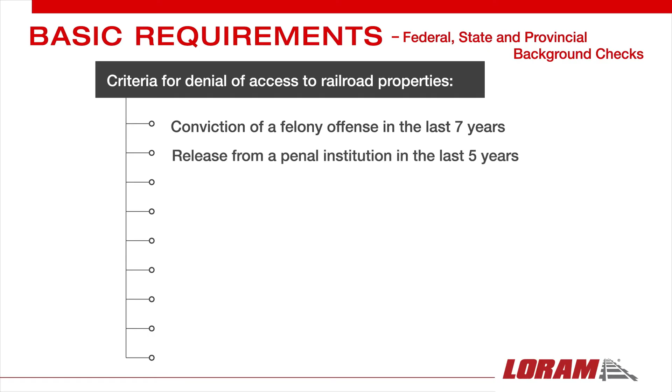As an applicant, you must pass Loram's federal, state, and provincial background checks. The background check includes history from the past 7 years. During the background check, our vendor will be looking for any of the events listed here, but not exclusively these events. Please review the list carefully. Having any of these events in your background could be grounds to deny you access to railroad properties, which in turn would make you ineligible to join our team.

As an applicant, you must also successfully pass the E-RailSafe background check. The purpose of the E-RailSafe program is to improve the security of railroad employees, operations, and facilities. E-RailSafe background checks are required by our customers to access their property.

Driving is essential to the job. You must meet Loram's driving requirements and have a current valid driver's license. We'll also review your driving history for the last several years.

Employees must also complete a urinalysis and alcohol screening during the first week of training. If you test positive for the presence of drugs, you will not be eligible for employment with us. Loram has a zero-tolerance policy regarding the use of drugs and alcohol.

Loram uses a third-party provider to administer the physical abilities test that assesses your ability to safely perform the essential physical functions of the role. You will perform a series of physical tests that could include gripping, pinching, pushing, pulling, lifting, carrying, or working in specific postures. If you have any questions regarding the basic requirements of the job you're applying for, please take notes and ask when we meet for an interview.

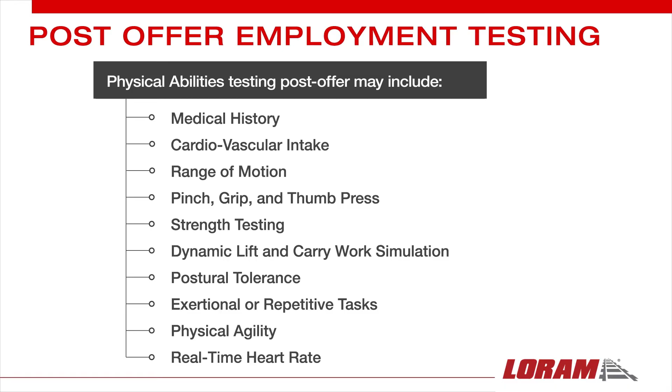During your first week of training, a pre-placement physical is required and is conducted by Loram's Occupational Medical Review Officer. The Medical Review Officer will make the final determination of whether you're fit for duty based on the findings. Review the list to see what is included in the physical.

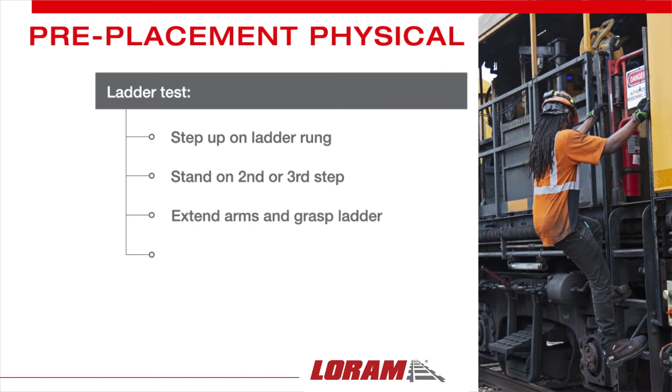Another requirement of training is the ladder test. Have you ever seen a ladder on the side of a rail car? Those are very similar to the ladders we have on our machines. You will be required to step up onto the ladder rung, which on the rail ladder is a second or third step up, and stand holding the ladder, extending your arms out, holding your own body weight for roughly 1 minute.

Here's a quick recap of the basic requirements.

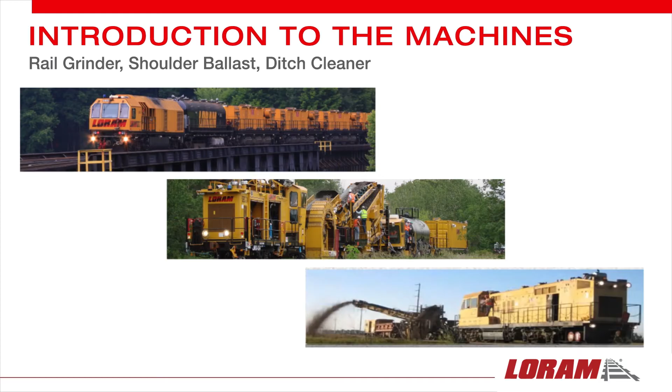Now that we've reviewed the basic requirements for employment, let's take a closer look at the 3 types of machines you might be assigned to as a rail equipment maintenance operator. Rail is the single most valuable asset for railroads. Replacing rail before it's necessary leads to significant costs and lost revenue. Rail grinding is the most effective maintenance practice to control deterioration.

Loram offers the most versatile technology in rail grinding equipment. Ranging in size from 4 stones to 120 or more stones, Loram rail grinders can fulfill any need in the industry. Our grinders incorporate high-powered, flexible grinding modules with a patented control system to maximize efficiency and create the most productive machines on the market.

In addition to extending rail life, a proper rail grinding program produces a wide range of benefits, both financial and operational. When you work with Loram, you're working with an industry innovator. We're currently collaborating with the National Research Council of Canada on cutting-edge research to validate the optimum amount of rail to remove to maximize rail life.

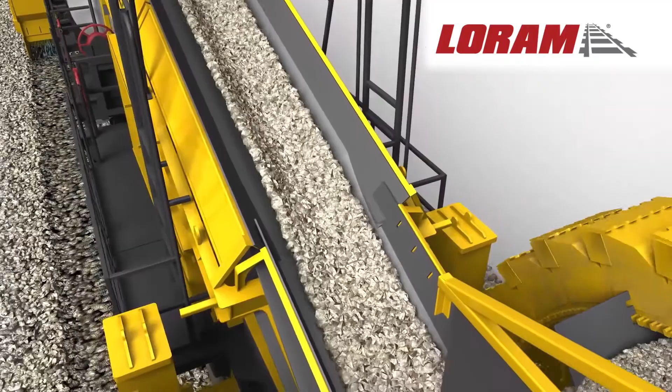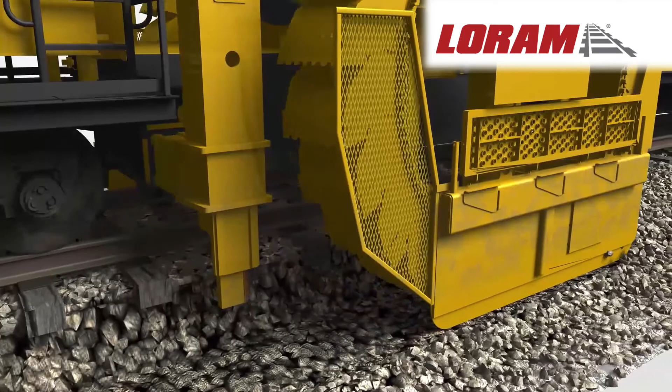Proper drainage is essential to maintaining a solid foundation for rail. Water trapped in the ballast section affects the interlocking mechanics between rocks. In turn, this causes the ballast section to lose strength and deteriorates track geometry.

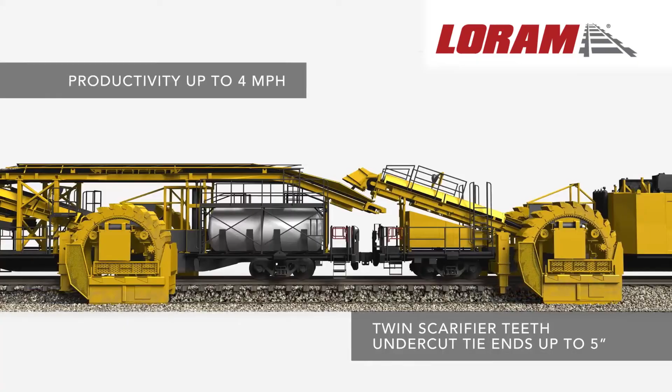Ballast cleaning breaks open mud pockets and releases trapped water to restore proper drainage. The Loram high-performance shoulder ballast cleaner removes ballast from the tie ends outwards. It then separates fines, and distributes cleaned ballast back to the shoulders and reshapes it, doing this all while continually moving down the track, setting the standard for speed, performance, and reliability.

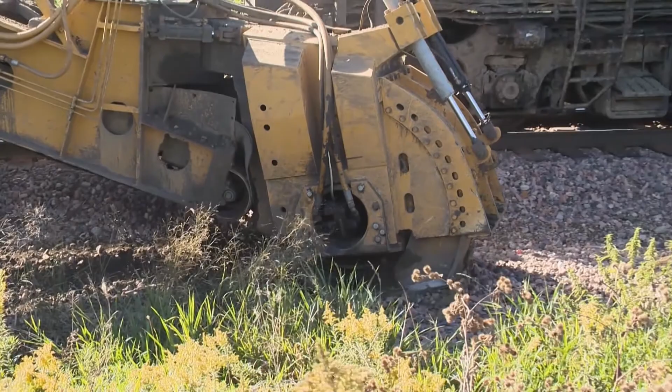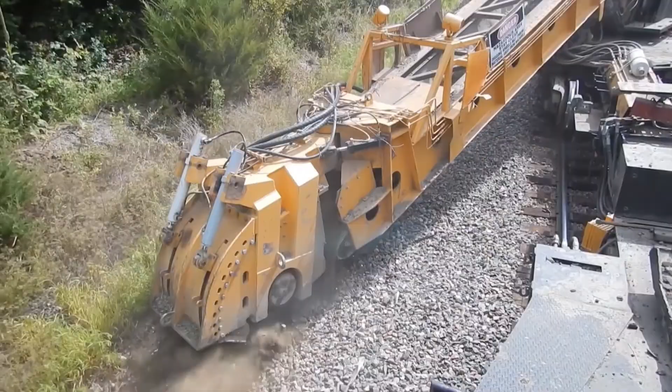You can't realize the full advantages of ballast cleaning without a proper ditch to intercept and divert water from outside the track and provide necessary drainage from the ballast. Loram's Badger Ditcher creates a drainage ditch that increases the stability of the ballast and subgrade by moving water away from the track. The machine's ditching wheel cuts a trench and shapes it to suit a railroad's specific drainage requirements. It can move up to 800 tons of material every hour, making light work of big ditching jobs.

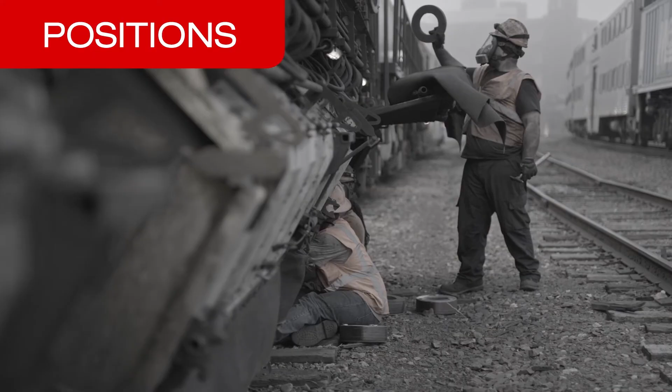Rail grinders have both an operating and a maintenance shift. Both shifts typically consist of 3 rail equipment maintenance operators. Crew responsibilities will be to take temperature readings, monitor gauges, and check fluid levels.

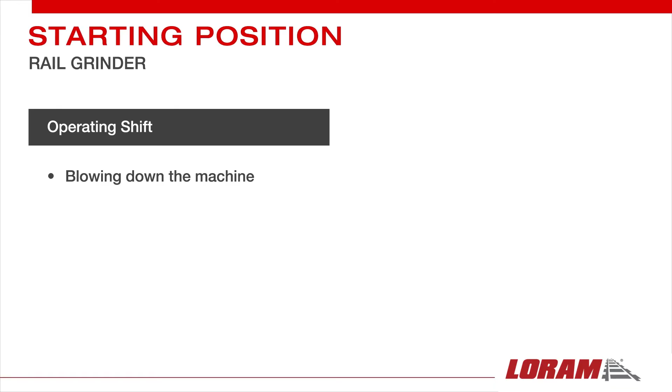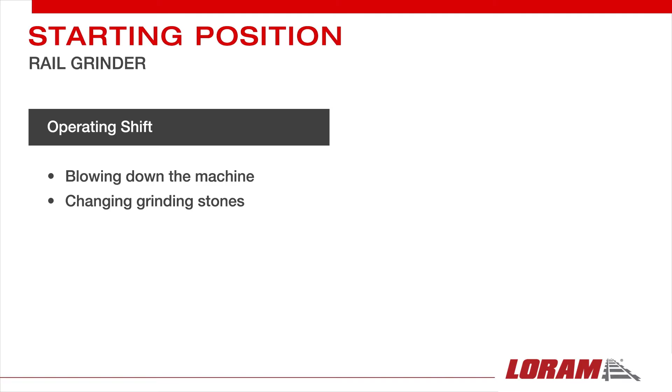You'll also be asked to use an air wand to blow out the air filters and various compartments of the machine. When the rail grinder has stopped working, you will be expected to change out carriage rollers and grinding stones. On the maintenance shift, you will be chipping slag, blowing down carriages, and assisting the more experienced crew members with maintenance and repairs.

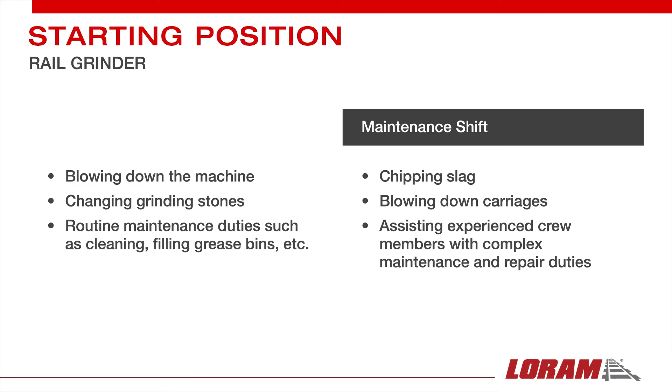Someone who is new to the ballast cleaner will start off in either the B-cab or ground position. As a B-cab operator, you are positioned in the rear of the machine and are tasked with regulating the amount of clean rock, known as ballast, that is being returned to the track bed. You are also responsible for regulating the blade that dresses out this ballast.

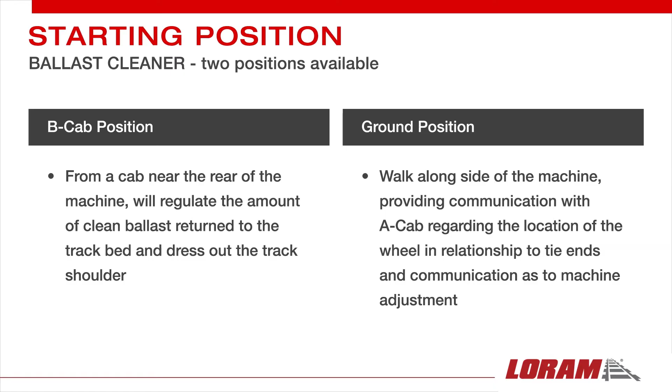The other position new employees can start in is the ground position. Here, you'll walk alongside the ballast cleaner and monitor the machine as it operates. Using a radio, you talk to the A-cab operator and let them know where the digging wheel is in relationship to the railroad tie ends. You also keep the A-cab operator informed when the machine is approaching a switch or railroad crossing and letting them know when to raise the digging wheel and when to place it back down.

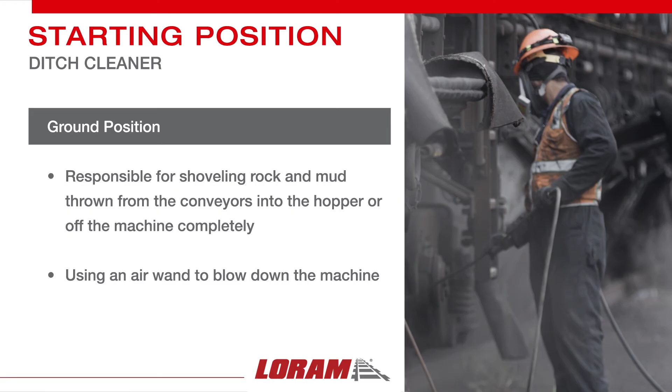The ditch cleaner requires 1 or 2 rail equipment maintenance operators. More experienced machine operators are responsible for operating the machine. New rail equipment maintenance operators are assigned to the work car and are responsible for aiding the operator by monitoring material flow through the conveyors, identifying and communicating hazards, learning how to maintain the equipment, and clearing stray rock, dirt, and mud from equipment and work surfaces. They will also assist the more experienced crew members with repairs.

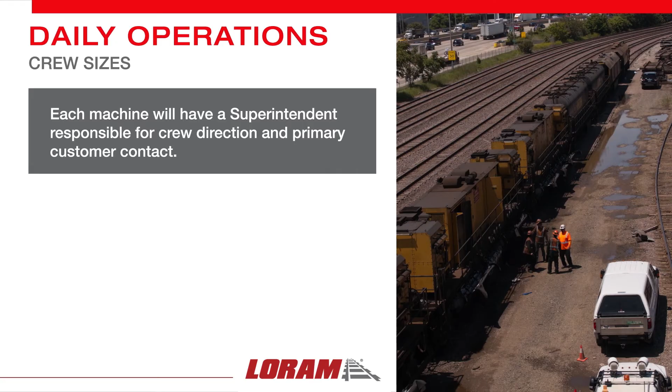Each machine has a superintendent who is responsible for crew direction and working with our railroad customers when they are on site. Crew sizes are specific to the type of machine. Here you can see the average targeted numbers of crew members per machine. Depending on contract and workload, these numbers can vary.

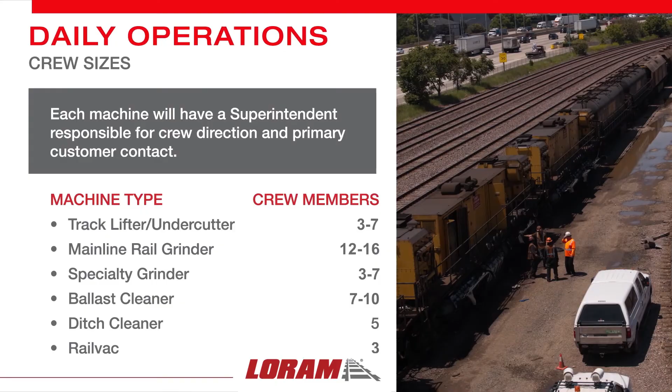With each additional machine we put on the rails and the increased staffing needs that go along with them, advancement opportunities at Loram can come frequently. We now have more than 90 machines in operation just in North America. The majority of our superintendents started in the same rail equipment maintenance operator position that you're currently applying for. It's not uncommon to get your first promotion within your first year. Exceptional performers have seen 2 promotions.

Here's what a typical career progression may look like working within Loram's fleet operations. Pause the video here if you'd like a few minutes to review.

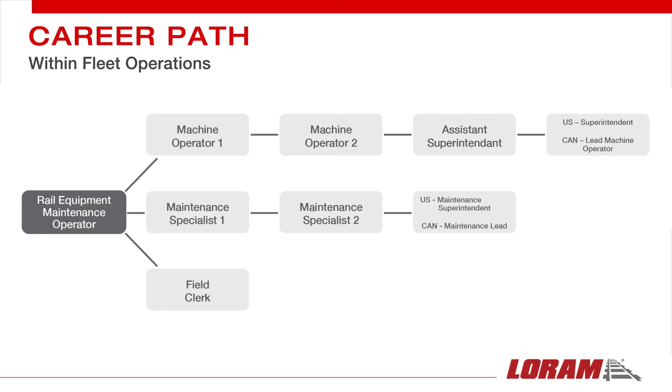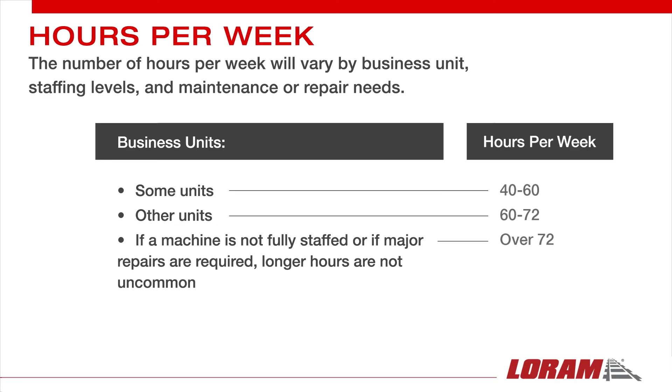Loram provides a complete benefits package that includes health and dental insurance, life insurance, accidental death and dismemberment coverage, and long and short-term disability insurance. We also provide health, dental, and life insurance coverage for your dependents. You must be an employee for 60 days to become eligible for benefits.

After interviewing with Loram for the rail equipment maintenance operator position, you'll typically hear back from us within 1 week. If a conditional job offer is made and accepted, we'll begin the pre-employment process, which includes your background check, drug testing, driving record check, and physical abilities exam. The entire pre-employment process can take a few weeks to complete.